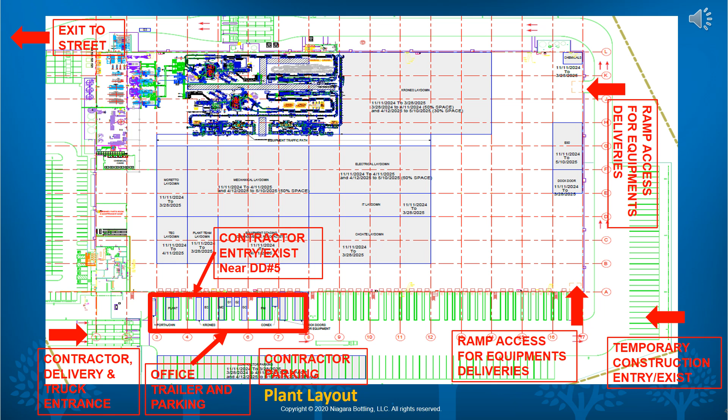Please refer to the layout of the building. All vendors and contractors must enter the facility from the plant south truck entrance. Parking is located in drop lot near trailers, and overflow parking is located at the front office building. Please use the dedicated contractor entrance gate while entering and exiting the site. Contractors must use dedicated man door to enter the building located near dock door 5.

Here are the expectations from the presentation. All contractors, subcontractors, vendors and their employees must attend this safety orientation their first time on site and at least annually thereafter. In addition to attending the safety orientation, you are required to fill out a few documents. Make sure your name, the company name, date, and time are clearly legible.

These documents are as follows: attendance sheet, safety/GMP rules, and hard hat decal.

Basic safety rules: the use or possession of alcohol or intoxicants on the job site is strictly prohibited. No employee will be allowed to work while under the influence of intoxicants. Violation of this rule will result in immediate termination and/or removal from the project site.

Tobacco or vaping use of any kind is strictly prohibited on our property. This includes inside vehicles parked in our parking lots. If you must smoke or use tobacco, you are required to go to a dedicated smoking zone outside the building. Check with Site PM for smoking locations.

The possession of firearms and/or explosives on the project site is prohibited. Disorderly conduct such as horseplay, running, or fighting are prohibited. Obey all safety warning signs.

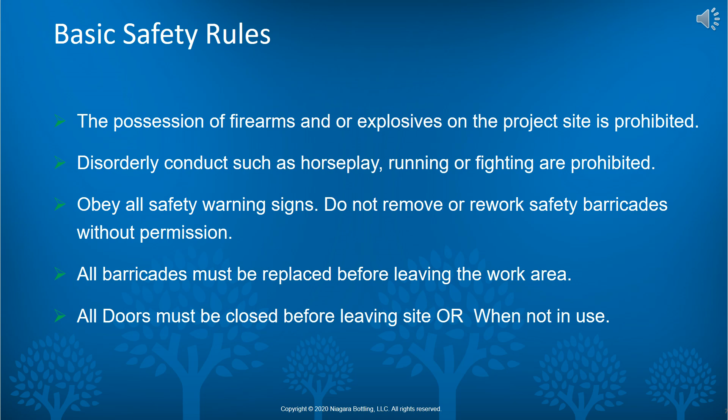Parking lot safety: yield to all pedestrian traffic. The speed limit is 10 miles per hour throughout our property. Upon arrival, please use the dedicated contractor entrance for entry/exit of the building.

Contractor parking shall be in the dedicated contractor parking area near front office. We recommend to post your name and number on windshield in case we need to contact and move the car. Note, during winter months, snow and ice may be present. Always be aware of your surroundings and your footing while on property.

If you must park trailers or equipment on site, you must get approval from the Niagara project manager and discuss where they can be parked. Niagara is not responsible for theft or damage to vehicles, tools, equipment, or personal property.

Make sure vehicles have no leaks that may create an environmental issue. You are expected to clean up all leaks, drips, and spills you create. No parking or driving of any vehicle inside the building without prior authorization.

Hospitality: eating or drinking is not permitted inside the building, except drinking water from cooler, but not the product water from March 2025 onwards. Restrooms are located outdoors, near the contractor trailer area. Food and beverage machines will be located in the cafeteria, after it is built. We require your food and beverages to be consumed in the cafeteria, or in contractors' trailers.

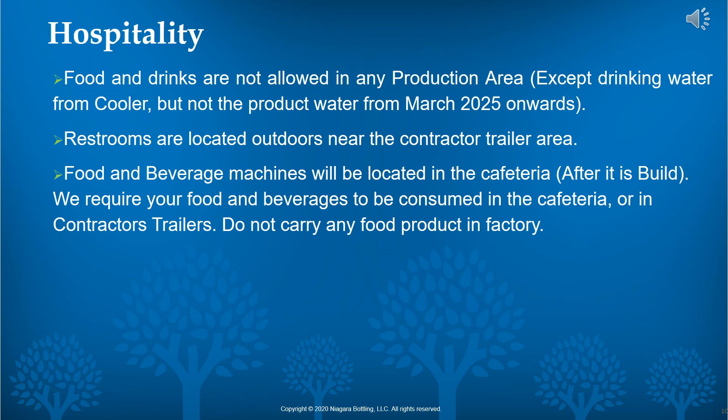General safety and responsibility. We are committed to ensuring the safety and health of everyone working at or visiting our facility. We will strive for continuous improvement in safety, health, and environmental performance. Plant operations are to be maintained such that the demands of production and construction do not take precedence over safety. We require safety to be your number one priority as well.

All incidents, injuries, accidents, near misses, must be reported to the Niagara Site PM immediately. Contractors are responsible for investigating and correcting all incidents involving their employees and subcontractors. Notify the Niagara contact person directly after any occurrence. Completed investigation report must be forwarded to Niagara PM within 24 hours of incident, including root causes and corrective action plan. A representative may be asked to participate in any investigation on Niagara property.

Inform Niagara PM contact of unique hazards you may encounter or anticipate creating. Any safety devices disassembled must be returned to working order. Work with your contact if safety equipment is not returned to its original design. Labels, guards, signs, etc. shall be intact prior to removing locks or returning a system to service. Contractors will perform safety inspections of their work area and address deficiencies. If using an outside inspector, notify Niagara PM before allowing them on site.

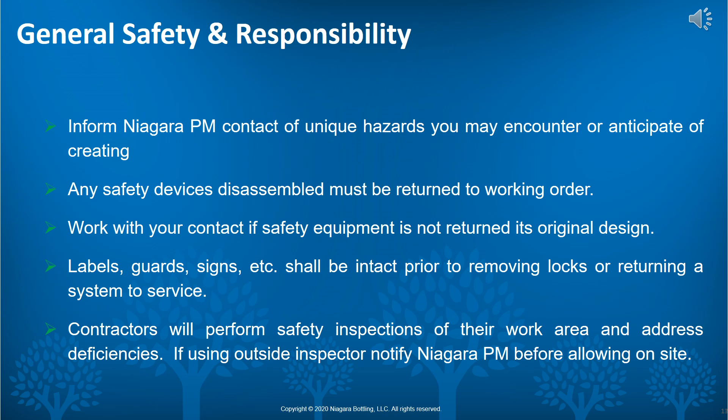Some of the site hazards are as follows. LGV and forklift: while working at height and in the plant, please use cones and a spotter to avoid any interference with LGV/forklifts. Also, while walking in the plant, please be cautious of LGV/forklift traffic.

CIP chemicals: on site, the following chemicals are present, including sulfuric acid and caustic. Please be aware of their locations and avoid interference. Hot equipment and piping: there is hot equipment and piping at several locations which are marked with labels. Please avoid touching. Slip, trip and fall hazard: look out for any slip, trip or fall hazards.

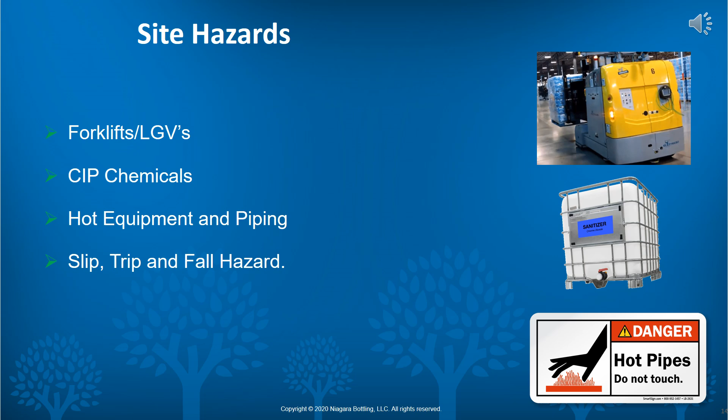Emergency evacuation: upon fire alarm, use the nearest door to evacuate outside the building. Assembly point is near the contractor trailer area, or front office area, whichever is nearest. Upon storm or heavy snow, take shelter inside the building in the locker room.

PPE during construction. Mandatory PPE: safety glasses, hearing protection, hard hat, high visibility vest. Full clothing in good repair is required. Protective steel toe boots are recommended in project areas due to hazards like nails or tools. Gloves specific for the task. Harness required when working above 6 feet.

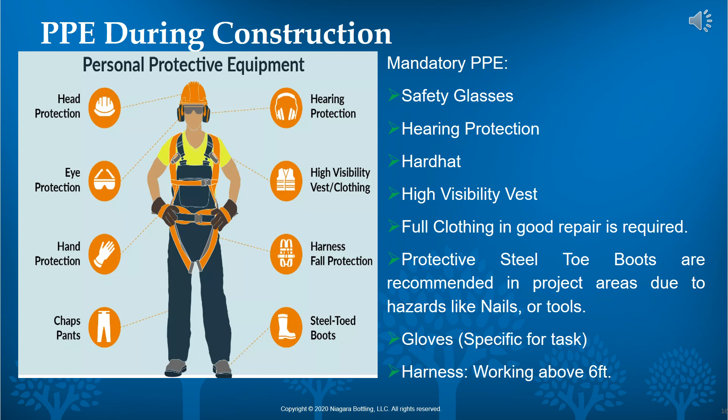PPE during operation and construction. In addition to construction PPE, the following Niagara GMP guidelines must be followed: use of hairnets, beard net for visible beard. No jewelry in plant - watches, rings with stone, bracelets, necklaces, earrings, piercings, rings. No food or drinks. Refer to Niagara GMP policy.

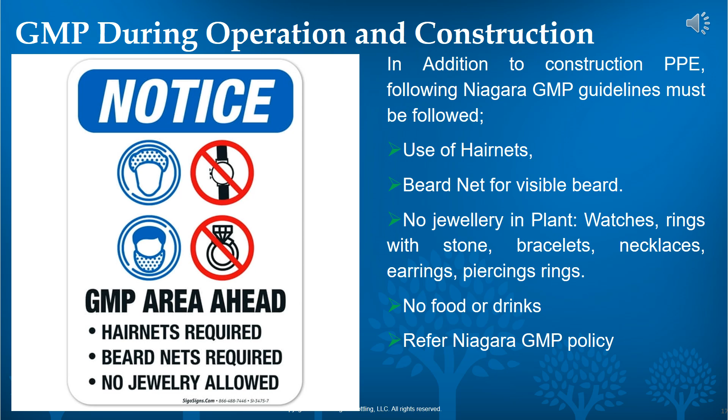Contractor communications. There will be a weekly or bi-weekly meeting with contractor site PM and Niagara PM with the following agenda: first 10 minutes will be dedicated to safety, communication of any safety near misses, communication of any unique hazards, communication of any hazardous chemical delivery, and project updates with each contractor.

Safety rules. Forklifts: always only trained and authorized personnel to operate powered industrial equipment. Lockout tagout: always use lockout/tagout to ensure isolation of equipment. Guarding: never bypass or alter any machine guarding, interlocks, or other critical safety features. Permitted work: always strict adherence to all permitted work systems like confined space entry, working at height, excavation. Electrical safety: all electrical work completed by qualified individuals.

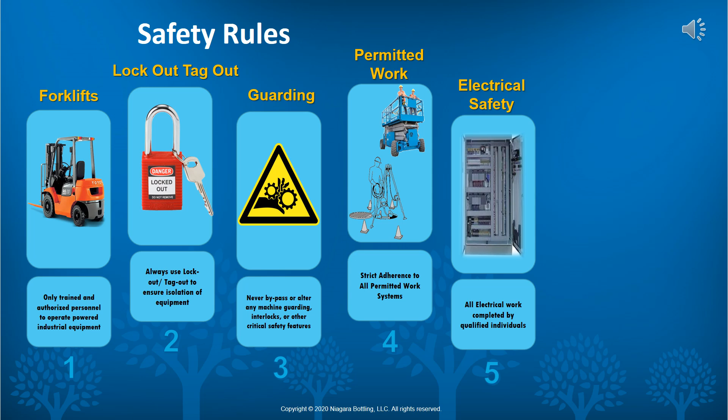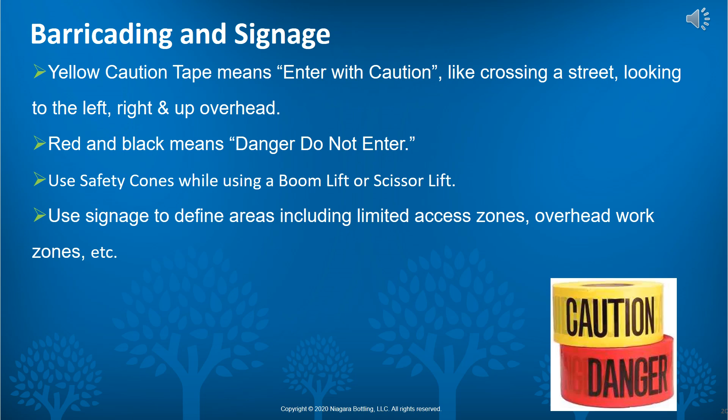Barricading and signage. Yellow caution tape means enter with caution, like crossing a street - looking left, right and up overhead. Red and black means danger, do not enter. Use safety cones while using a boom lift or scissor lift. Always have a spotter while working at height. Use signage to define areas including limited access zones, overhead work zones, etc.

Hot work welding. Hot work refers to those situations where welding, cutting, burning, brazing, grinding, sawing, spark testing, use of power tools, internal combustion engines, sparking motors, etc., or the use of open flames in areas may initiate a fire or an explosion.

Fire watch is required at all times, even during breaks. Fire watch duration must be a minimum of 1 hour after completion of hot work activity. A fire watch duration of 2 hours will be required under the following conditions: wood floors, fuel conveying systems, and steel plates over wood floors. Contractors' fabrication areas must have welding curtains.

Contractors are required to sign a hot work permit daily while performing any hot work. All contractors shall have fire extinguishers in their fabrication area.

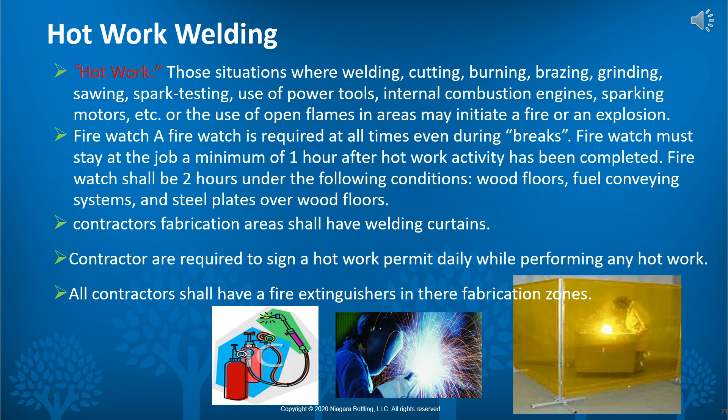Pipeline breaking permit. A hazard assessment in the form of a pipeline breaking checklist and permit must be filled out and issued prior to initial safe first break opening on pipelines, process lines, and tubing that contain, or may have contained, hazardous materials or may have been under pressure. Hazardous materials include the following: gas, liquid, solid, flammable, toxic, combustible, corrosive, hot, under pressure fluid, or unknown fluid.

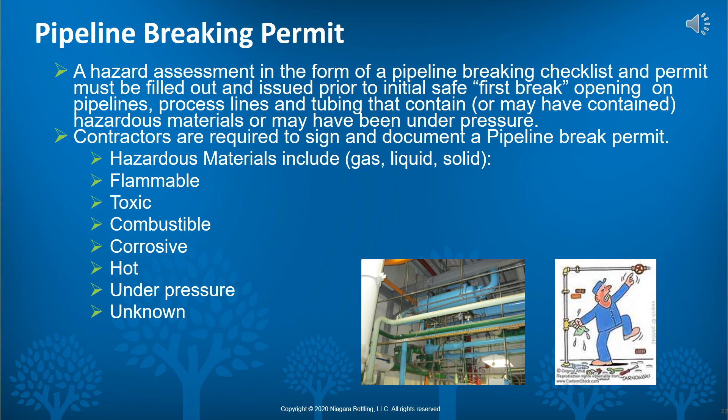Confined space entry. Niagara Site Team is responsible for determining if acceptable entry conditions are present at a confined space where entry is planned, for authorizing entry and overseeing entry operations, and for terminating entry as required by this procedure. Confined space permits should be approved by Niagara personnel.

It is very important that you do not enter a confined space unless trained to do so. All confined spaces are marked as 'Danger, Confined Space, Do Not Enter' or 'Danger, Confined Space, Enter By Permit Only'.

Excavation. The work area may be considered a controlled access zone. Do not enter areas that are taped off or otherwise marked with danger or caution signage. Review underground drawings before excavation in order to avoid any underground hazards. Underground scans are recommended before excavation. Contact the Niagara Site PM for any questions before excavation.

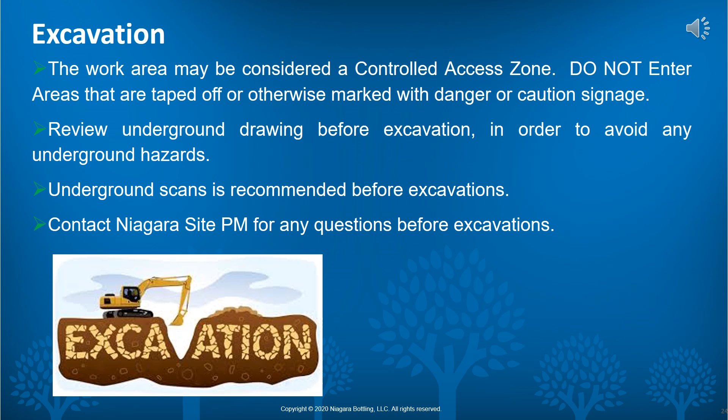Working at heights. Working at heights is defined as any work at a height of more than 6 feet above ground surface or the next working surface level, or within 6 feet of any hole or opening larger than 12 inches by 12 inches with a depth of more than 6 feet.

Risk assessment has been conducted and safety precautions identified. Appropriate fall protection is provided, including harness and anchor points. Work will be performed by qualified workers familiar with the safety precautions and risk assessment. Work does not endanger others in the immediate area where the work is being conducted.

Controlled access zone: the area is marked and restricted to authorized entrants only. This means shutting down operations in the area, with only persons performing work allowed to enter. Use cones and a spotter to avoid interference with LGV and forklift traffic. Contractors are required to fill out a working at heights permit daily.

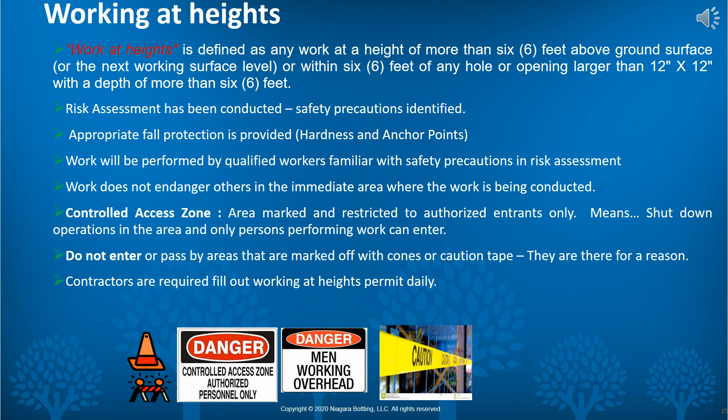Aerial boom lifts and scissor lifts. Operators must be trained and authorized. All work must be accomplished with feet firmly on the deck. All workers will utilize a personal fall arrest system, harness, connected to designated lift anchors. Fall restraint is required, with lanyard secured to platform anchor points.

Any working at height shall require a dedicated spotter for LGVs. Use of safety cones is mandatory in LGV areas. The lift operation and safety manual shall be present in the lift. All lifts will be used in accordance with manufacturer's instructions and limitations. Periodic inspection of the lift is required. Operators must have documented training cards.

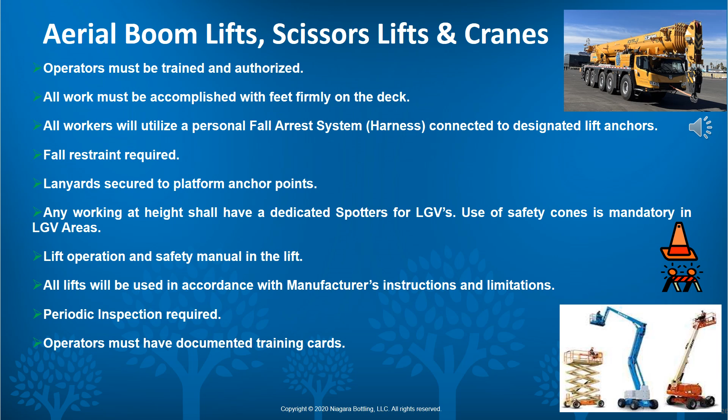Industrial vehicles or mobile equipment. Sound horns when rounding corners. Use a spotter when obstructed views exist. Electrical, diesel, or LPG equipment must be approved by the Niagara PM and must include an exhaust scrubber. No standing on forks while in motion. No walking under suspended loads. Speed limit is 5 miles per hour.

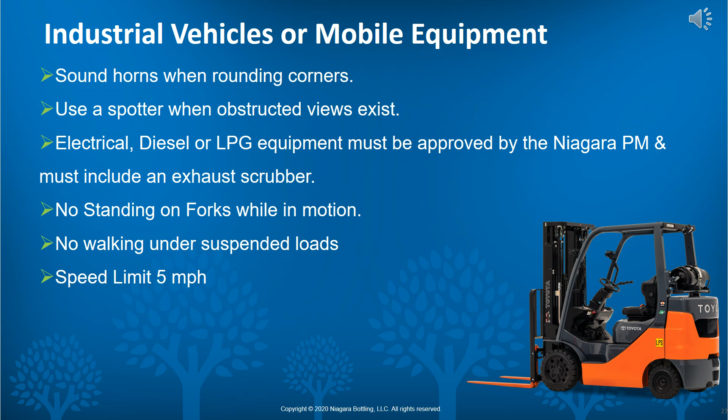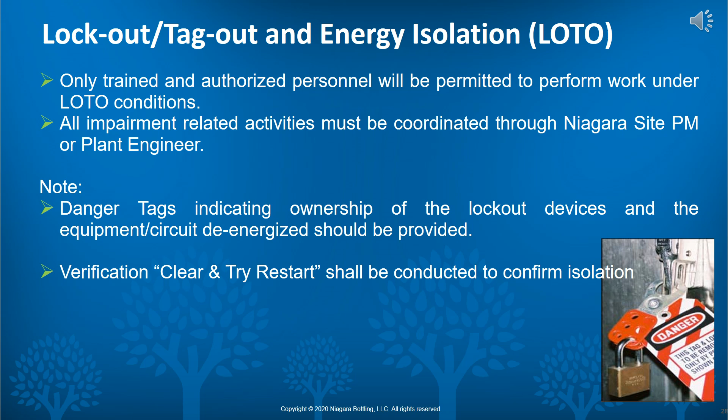Note: Danger tags indicating ownership of the lockout devices and the equipment or circuit de-energized should be provided. Verification, clear, and try restart shall be conducted to confirm isolation.